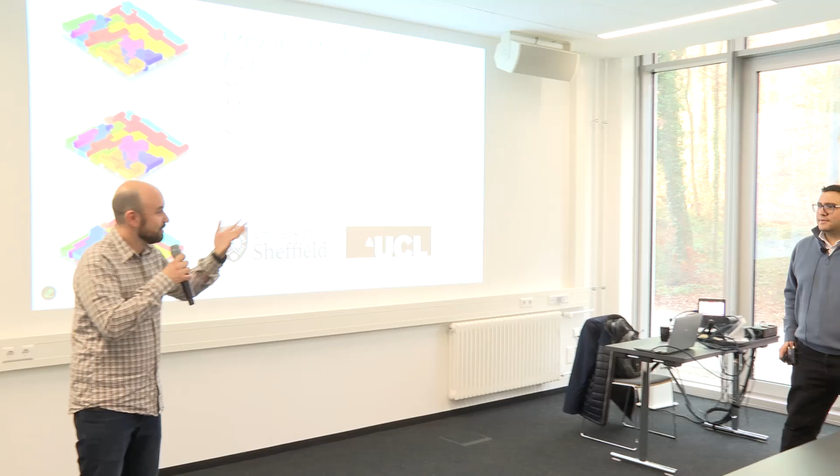After UCL, he returned to Sheffield, first with a strong teaching position where he got a few awards for being one of the best teachers of the university. Sorry, I increase the expectation a bit, but we will now see his presentation skills. And now he has moved to a fully research position. So he's back, and we are really happy to have him back in research.

So especially all the experimental biologists in the room, keep your ears attentive to see if you can find a link with what the technology proposes, if it can be useful for your studies, because it might be interesting to create a collaboration with Salah and see if we can attract him here to bring this technology with him and use it for our stuff. So I won't take further time. I leave you the stage.

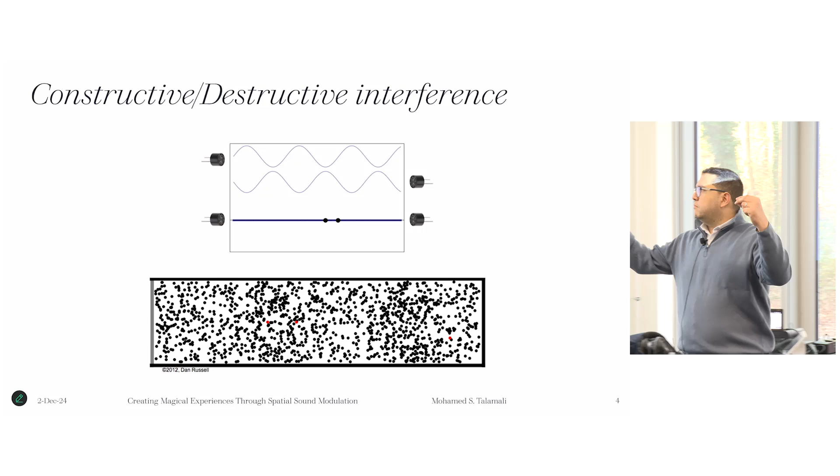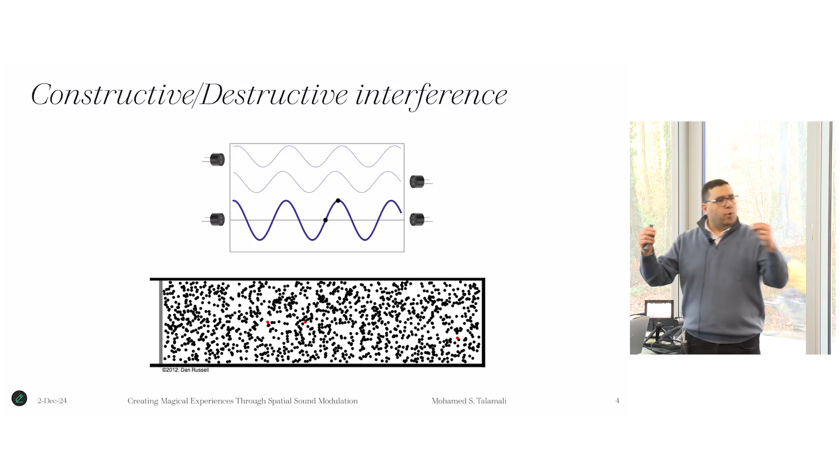So if you can let multiple sound waves interact together, you can affect the pressure of air the way you want. Here, if I put two speakers facing each other and let them emit sound waves that travel in opposite directions, I can create what is called a standing wave. As we can see, the resulting wave just flips its amplitude, but there are points that don't change in pressure. Why do we call it a standing wave? Because it's not traveling, it's staying there. So this is one example of waves interacting with each other.

Another interesting example of adjusting the pressure of air is when you put multiple speakers. You can put them in an array configuration, like here, or in a bowl configuration. And by controlling the phase delay between the sound waves, you can let all the waves arrive at the same point at the same time, such as here, and you create what is called a focus point.

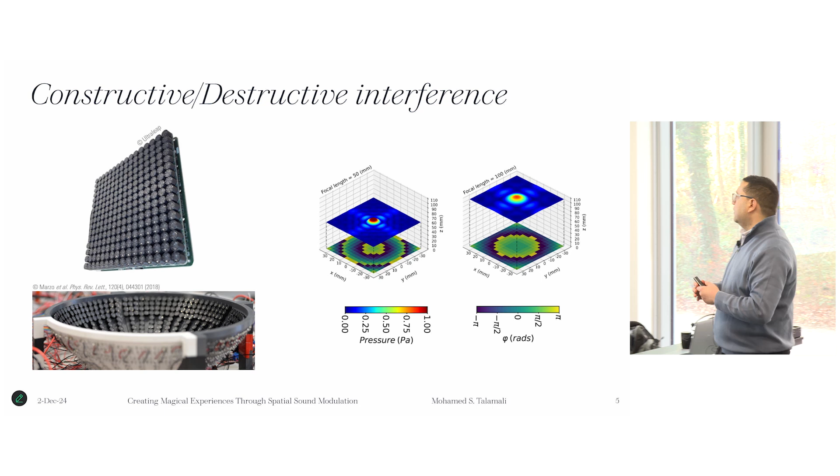So all the sound waves will meet together, and they add with each other, and they create a high pressure at that point. In this case, from now on in this talk, you will hear me speaking about spatial sound modulation. And it is this technique of using sound emitters to vary the pressure of the air around them.

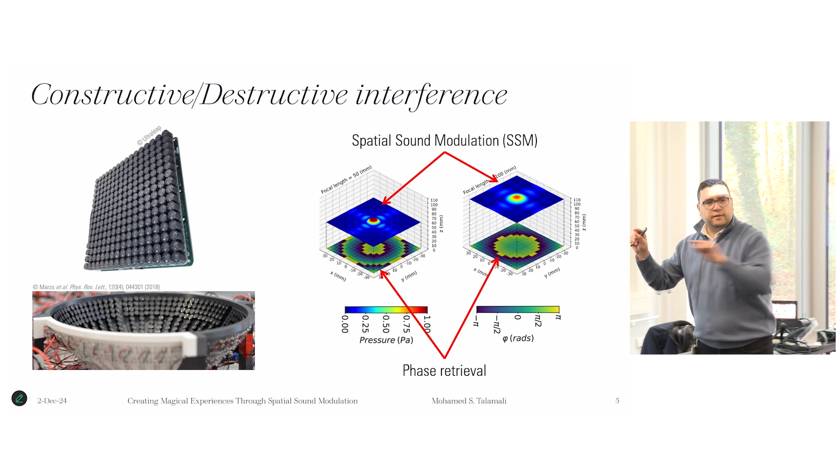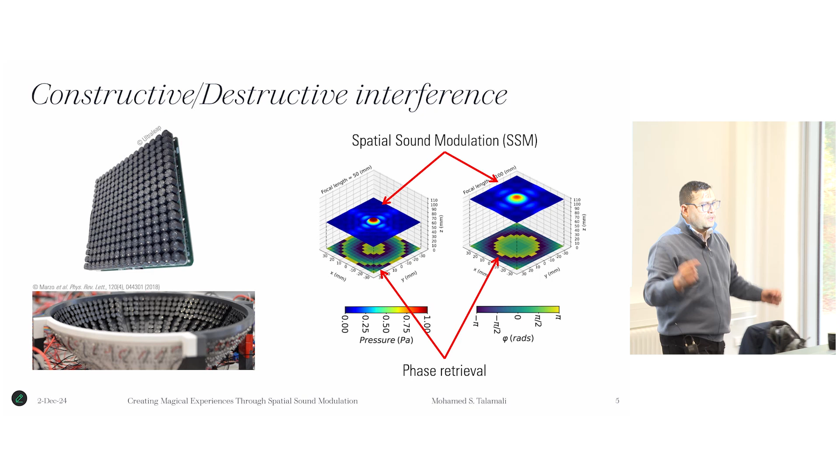And one key thing is to find the delay between these waves. And that's called phase retrieval. So to let them all meet at the same point, you need to find the delay of each speaker, so they all meet at the same point. And if we say pressure applied to a surface, what we say in physics, we say a force. So the sound waves, when they interact with objects, exert on these objects what we call acoustic radiation forces.

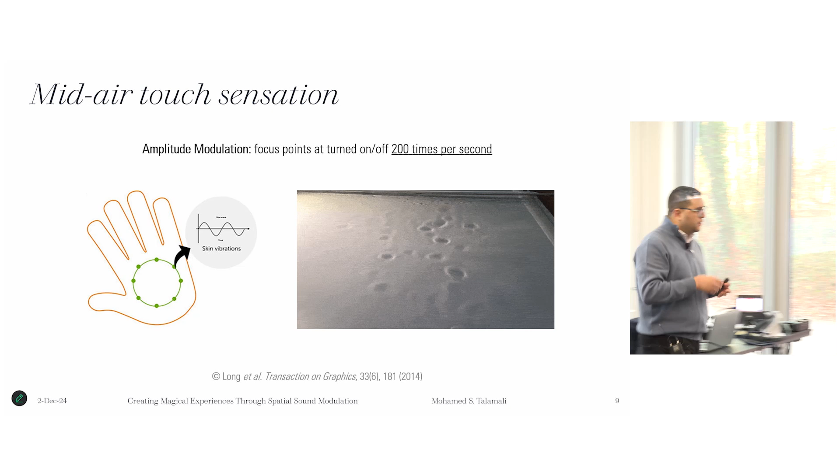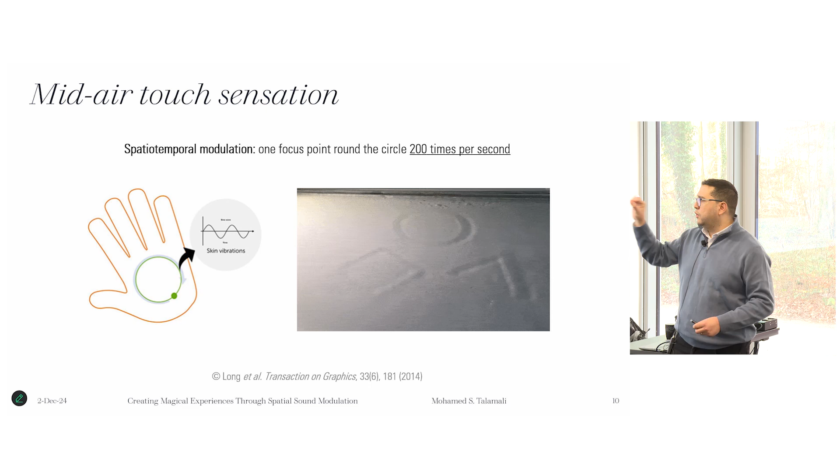So they know that the human's tactile receptors are able to sense things if they change at a frequency of 200 to 300 hertz. So they turned on and off this speaker 200 times a second. And you can see the effect of that on an oily medium. But also they have done the same thing using one focus point. So they create that one focus point and they keep moving it as a circle, right? And they do the full circle 200 times per second.

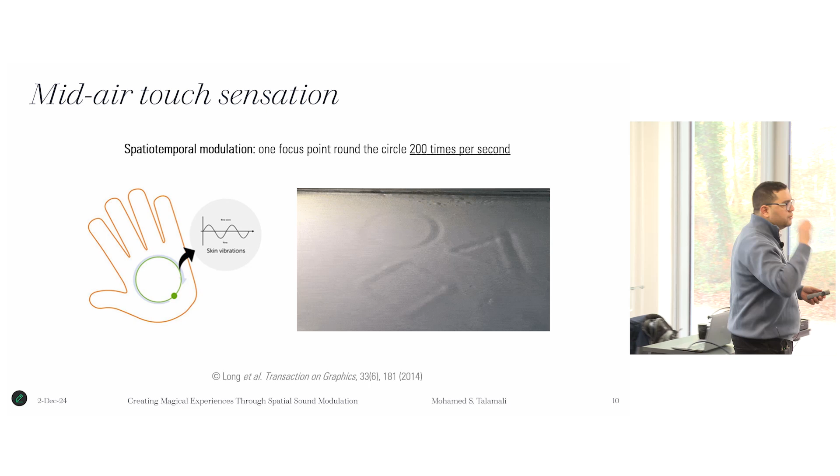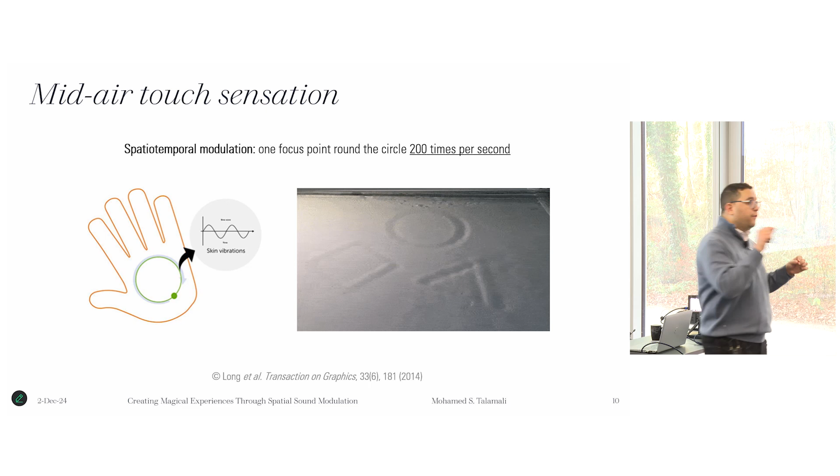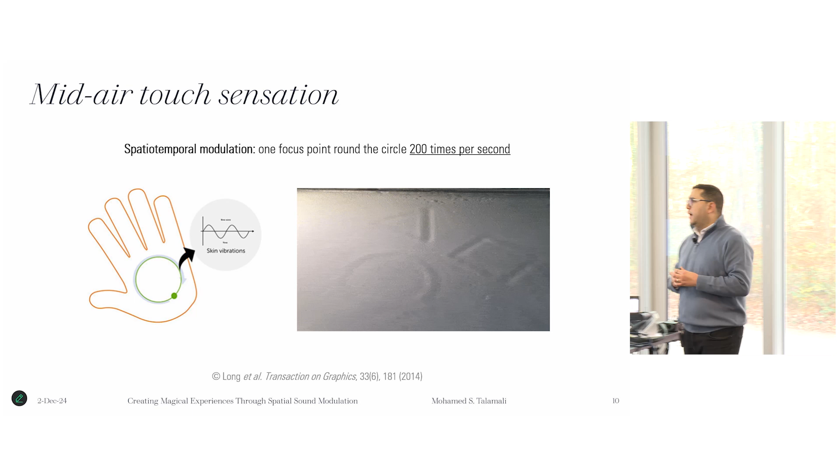So the question you'd be asking, how to get all the sound focused on these points. So what did we say before? How are we able to focus sound waves in a point, for example? What we said earlier is that if I want to get sound focused all on the same point, I need to find the delays between the sound waves to make sure that they arrive at that point all at the same time. So they add up together, creating this zone of high pressure. So what they have here, I'm trying to make it simple. There are a lot of equations, and I don't want to bother you this morning.

So they have desired focus locations, and they have models to compute the pressure field that these speakers together will create as a function of the phases of each speaker. And they add some constraints to adhere to the transducer specs, their power, etc. And they combine this into an inverse problem. So they have an equation that contains the delays of the speakers, the phases, and a desired sound field they want to create, and they solve this inverse problem on the computer to find those delays.

One challenge is you need to do it really fast. If the user is moving their hand and the intersection is changing and the point of focus is changing, you need to do this computation really fast. So the method you use needs to give you that speed.

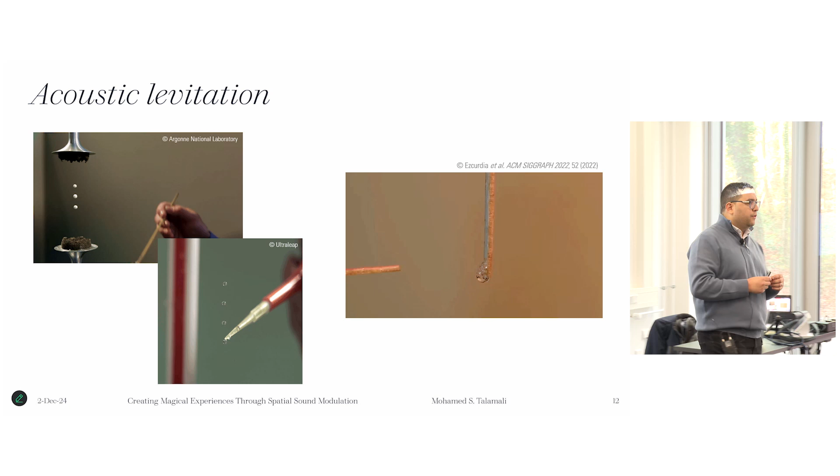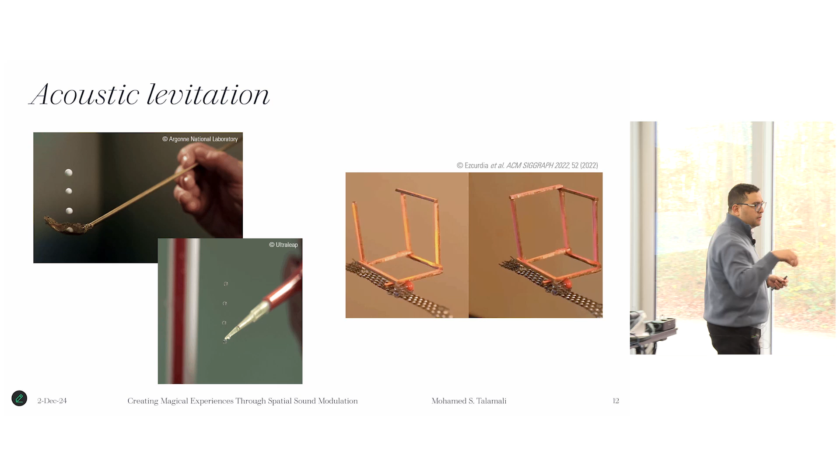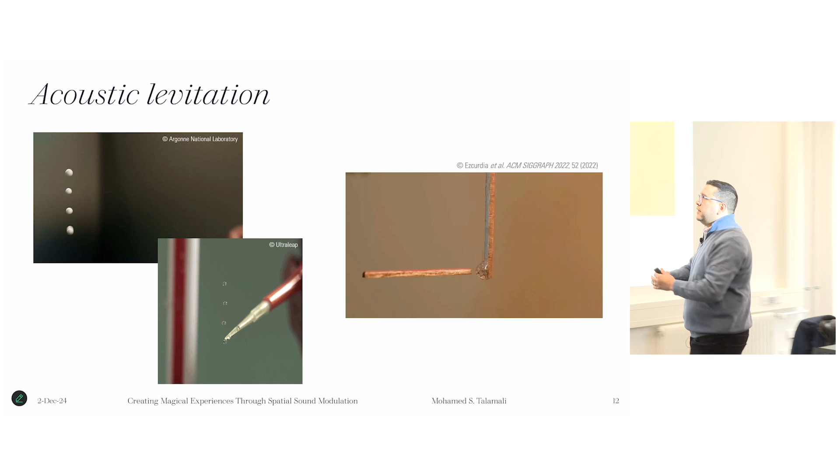So another application of this control of sound pressure is levitation, acoustic levitation. Using the sound pressure, you can keep objects suspended in midair. So let's not think of big objects, just really small objects of light weight. That's what the force created by that pressure can give you. So you can levitate these small spheres, polystyrene spheres, or you can even levitate some liquid droplets.

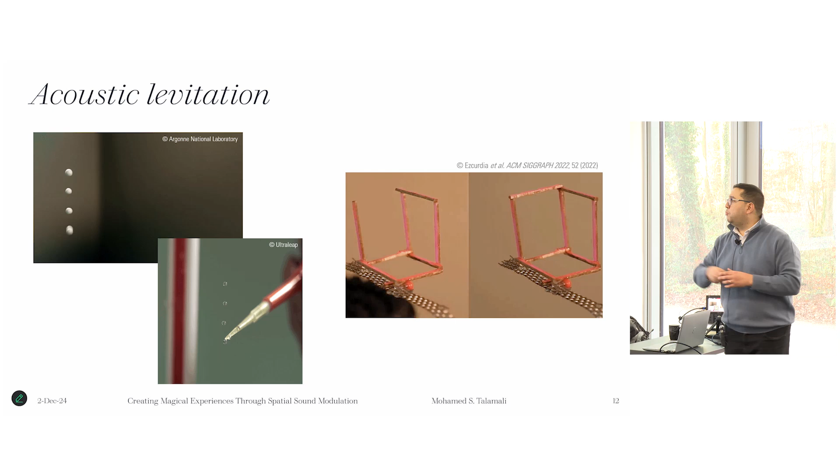But recently people put a levitator as the end effector of a robotic arm, so they did cooler stuff, such as using that levitation force to assemble things together.

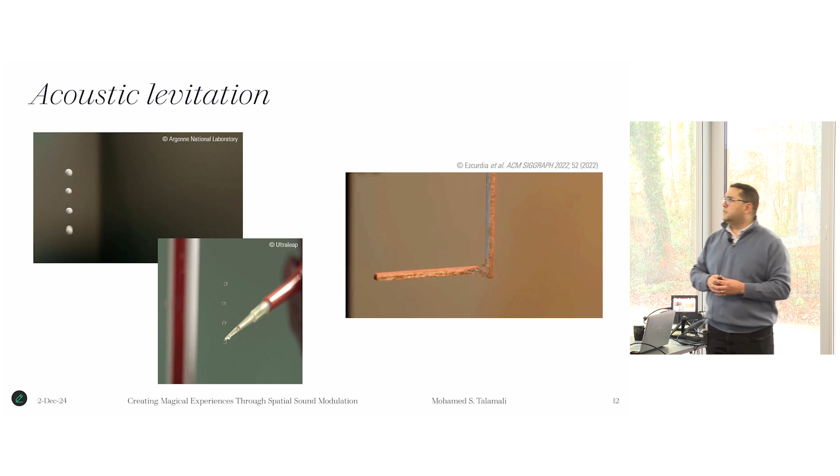Traditionally, you can do acoustic levitation simply by aligning speakers. As we said earlier in the second slide, I think, you put speakers and you let them emit sound opposite to each other. So if you want to make a little levitator, you bring two ultrasonic speakers. Actually, you must be thinking, how can we keep emitting all this sound? Won't it be annoying? This is using ultrasound, so it's not audible to humans, right?

So you bring these two speakers and you let them emit sound waves, and they create this standing wave, and we know from this radiation force that those objects will be kept at these nodes there. If you want bigger forces, you can make a setup like this, where you have these two bowls of speakers, you align them with each other, then you let them emit sound.

One thing here is that the sound emitted by the top and the bottom speakers is pi or 180 degrees out of phase. The reason for that is, if you don't do that, you will still be able to levitate. It's just that the levitation point won't be symmetric. This is the traditional setup of a levitator.

The issue with this is that you will only be able to levitate things in the middle of the setup. So if you want to move this bit here, it won't be that simple as just emitting sound waves. So people came up with a framework that allowed them to actually levitate this object, but also move it around.

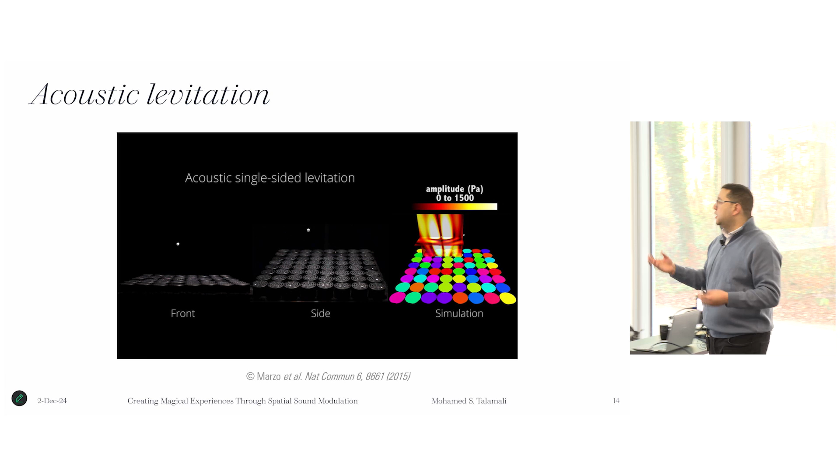And how you can do this is by finding these phases, more complex than simply turning on, sound gets emitted and you get the levitation; you need to set the delays of the speakers in a smarter way. And they were also able to do these rotations, so they were able to rotate this levitated particle, but you can even let that particle spin using this bowl configuration of speakers.

The way they did this, they have a model that lets them compute the sound propagation from each speaker, and that's a function of the delay from each speaker. Once they write the pressure at any point as a function of the delays, they compute something called Gor'kov potential, and it's a field whose gradient gives you the force exerted on an object at a location. And when you apply the Laplacian to that Gor'kov potential, you get the strength of the force at that point.

And then, if you write the strength of the force in terms of these phases of the speakers, you can do an optimization to solve this inverse problem, to find the phases that allow you to maximize the strength at certain points. And those points are called 3D traps. So they trap your particle at those points.

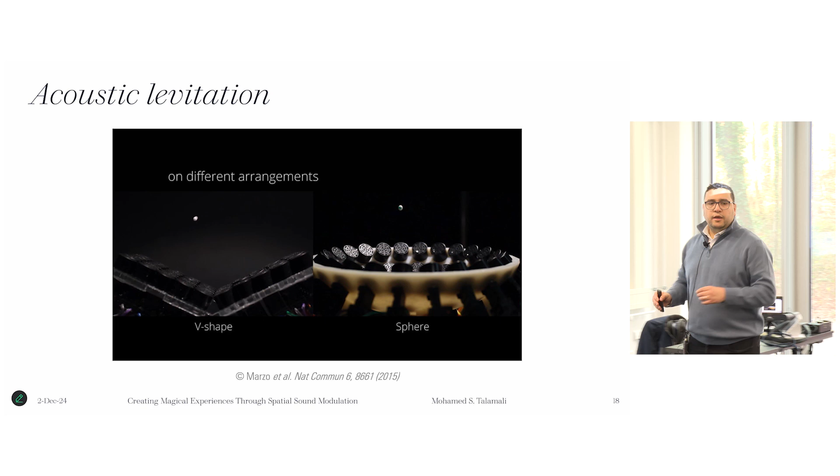And thanks to this technique, originally we said you need two boards of speakers, one on top of each other. Thanks to this, as they are maximizing the force, you can even levitate this particle using a single-sided board. And as there is some optimization behind these forces, not simply letting sound waves hit each other, you can even create forces that defy gravity.

And then we have Hirayama and colleagues in 2019. They made this cool display they called a particle-based display. Since you are levitating that particle, you keep moving it fast enough to create what's called persistence of vision. So you start seeing a pattern of the particle's path. So if you shine light on it, you can see something in 3D like this.

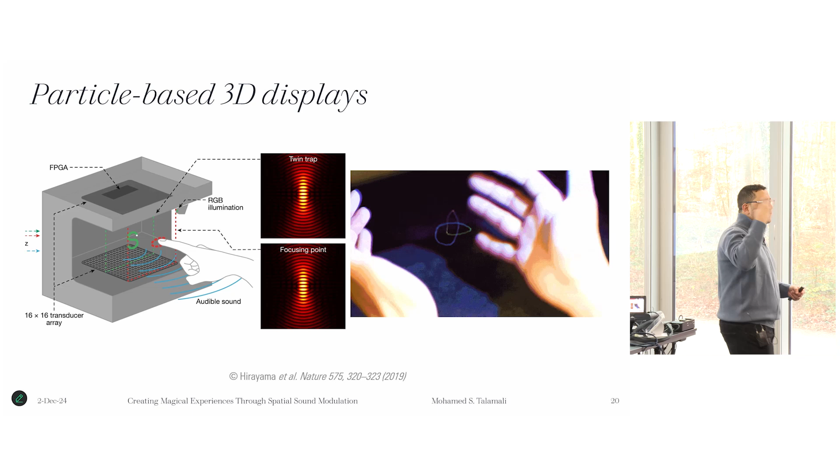And they also used the same technique to create multiple points. So one point will be trapping the particle, another point will have sound focused, so if someone puts their hand there, they can feel it, and at another point of pressure, they vary it to the pattern of a certain voice, so you can hear sound coming from a point in the air. There is no speaker, but they vary that pressure following the pattern of a certain voice, so you can hear that voice.

So in this application, I kept speaking about this speakers array, but there is one limitation of this speakers array. They are quite bigger than the wavelength of the sound. So if you want to create really complex pressure distributions, such as these images, you will get what is called an aliasing effect. This is because they don't adhere to the Nyquist sampling theorem, which tells you if you want to get full information, you need at least to sample at half the wavelength. So you get this aliasing effect.

So people started thinking about other technologies. So they created what's called acoustic metamaterial. So now instead of having a speaker that you control to change the sound delays, you create some structures, materials. When the sound interacts with those structures, those structures will introduce that phase delay you want on the sound waves. There is the transmissive format. So you have a speaker and some materials. When the sound of those speakers passes through that material, those materials will introduce a phase delay on that sound.

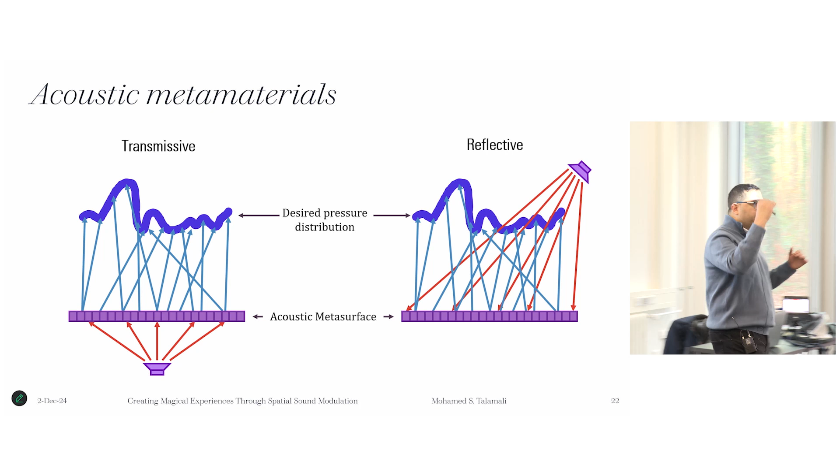Or you have the reflective format in which sound waves hit the materials, get reflected, and that reflection happens after the introduction of a sound delay. Think about it, if I have a sound wave hitting a material, I can adjust the height of the material to change the relative delay between multiple waves.

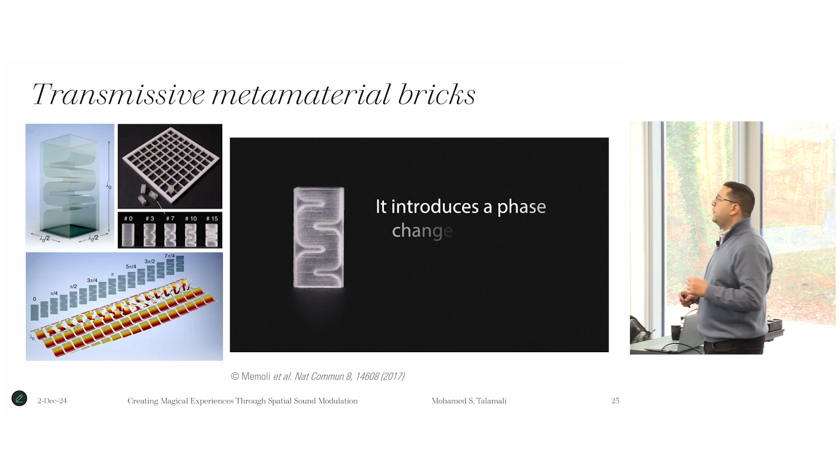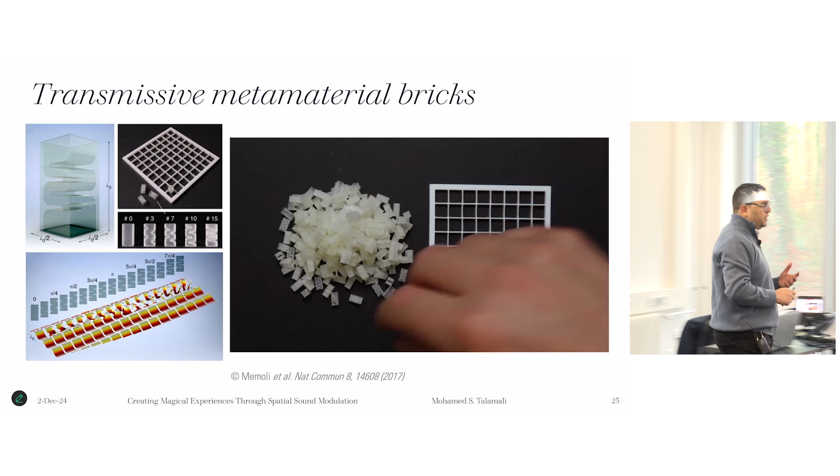So we have here Memoli and colleagues, they created what they call these metamaterial bricks. So they have this labyrinthine structure, and when the sound wave passes through this structure, each structure corresponds to a certain phase delay. So the same as before, I control electronically the speaker to have a certain phase delay. Now I can make this material, each of them will introduce a phase delay. So I don't have to do any electronics. I just turn on my speakers normally without any phase delay, but as the sound emitted by those speakers passes through this material structure, I get the phase delay I want.

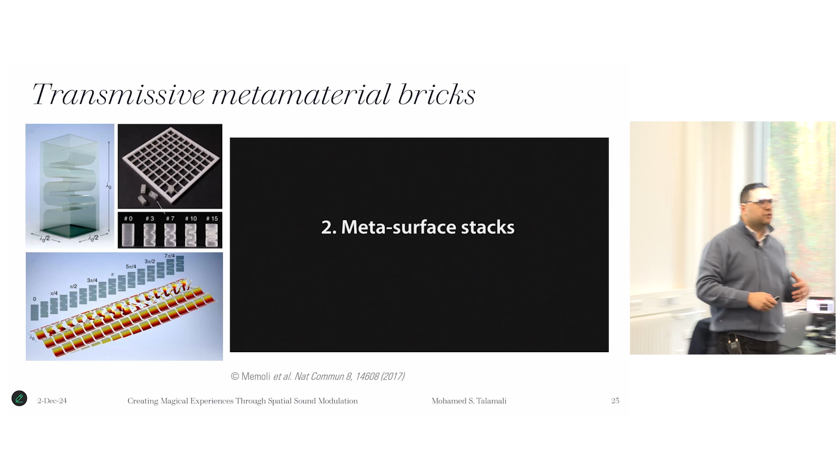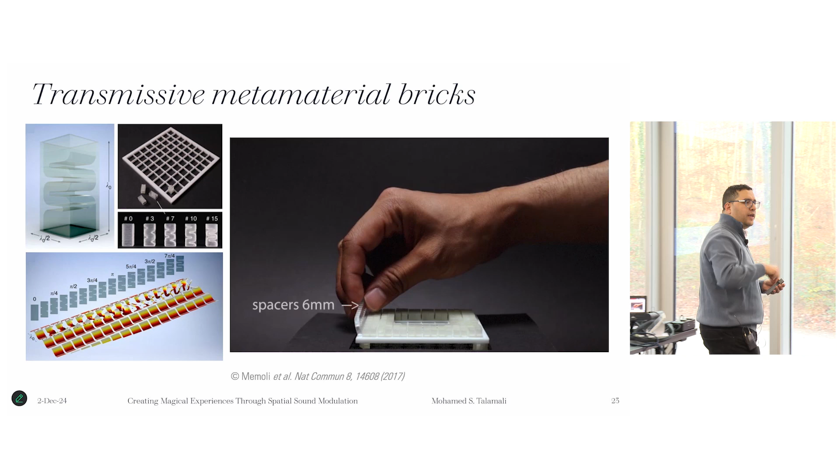So if, for example, I compute phase delays to levitate or focus sound, I can create those phase delays using the materials. So here they put this structure that contains many bricks. Each brick will have a corresponding delay. So they are able to shape the sound field and levitate a particle. So that was an example of a transmissive metamaterial. So sound passes through it to get this phase delay.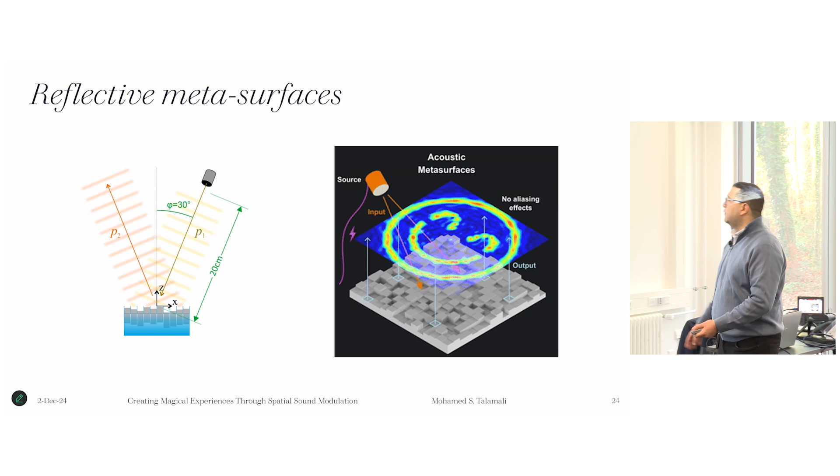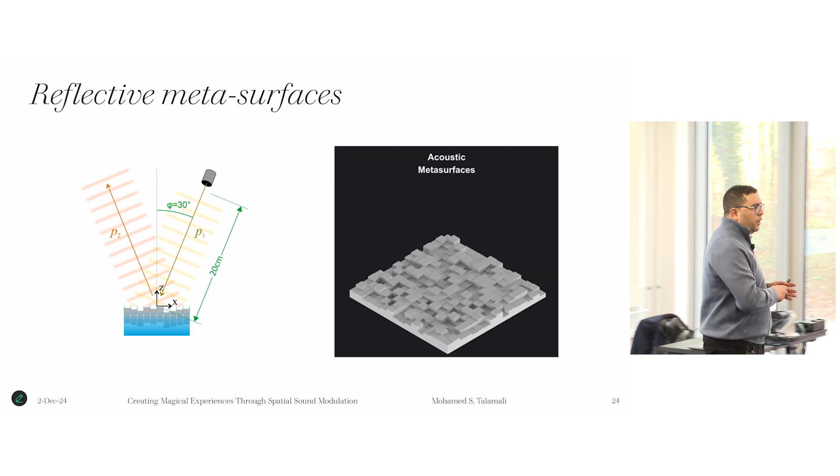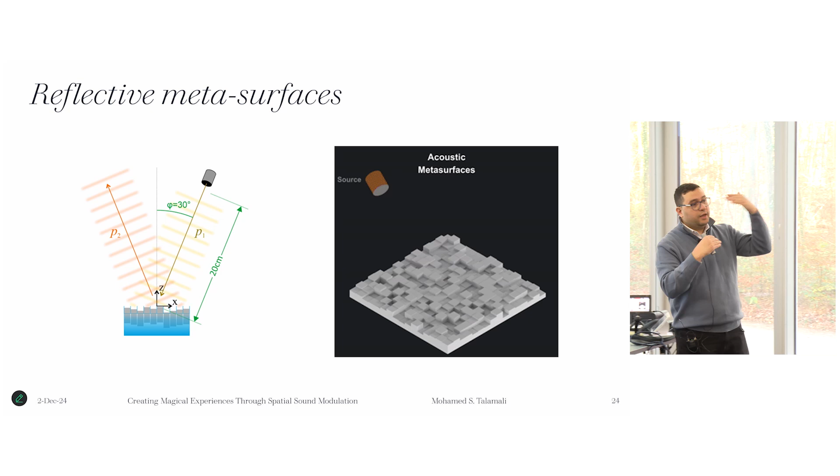Another option, as I told you, is the reflective case, the reflective metamaterial. And here you will have this material of different heights, and depending on the height, you will get a specific phase delay. Think about it, if I have two materials with a height difference, if the sound wave hits this one and gets reflected, it will arrive quicker than the next one, because for this one, it has to travel more and take more time to arrive at the same point, right? So this principle allows us to create the same effect, such as levitation or touch sensation, by creating those phase delays we want.

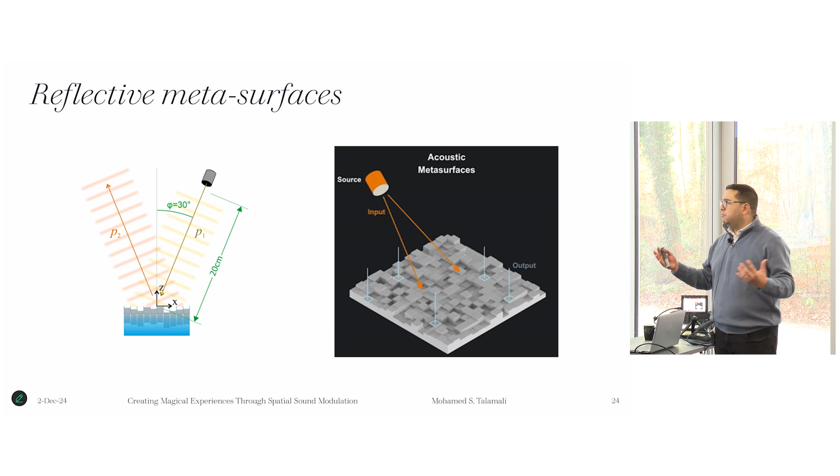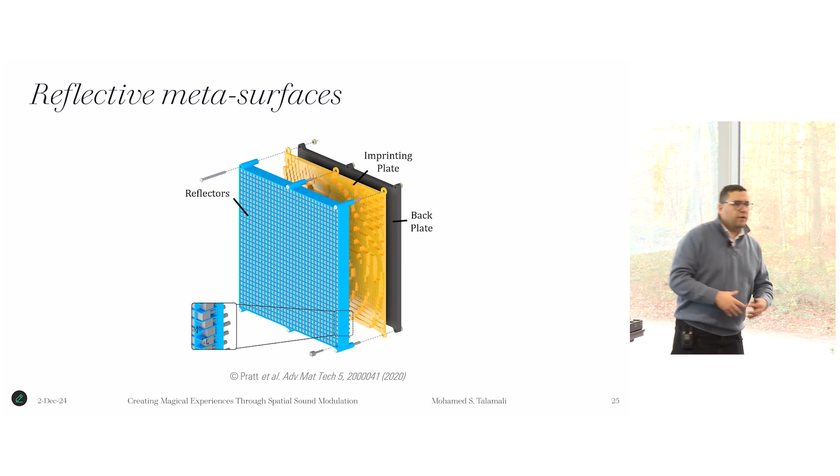So we have Pratt and colleagues. They created what's called manually reconfigurable metamaterials. So here you have this reflector. They are just pins that slide up and down. And if you want to get a certain phase delay pattern, you can 3D print these plates, and you put them in, and you introduce this phase delay across the surface.

So let's speak about the cost of these devices. Let's imagine the case of the speakers, phased array transducers, and the case of a reflective metamaterial. So for each speaker, you need a controller. You need a shift register to vary the phase or delay those signals. You need some amplifiers, and you need to connect each speaker to a controller. So if you have 256 speakers, you need, for example, an FPGA with 256 control points, and that's quite expensive, right?

And if you are speaking about a reflective metamaterial, if you want this reflective material to adjust the height of the elements live, what you need to do is put stepper motors behind them, so you push them up and down. So for each element, you need a motor driver, plus a control signal. So the cost of these devices is proportional to the number of elements you have.

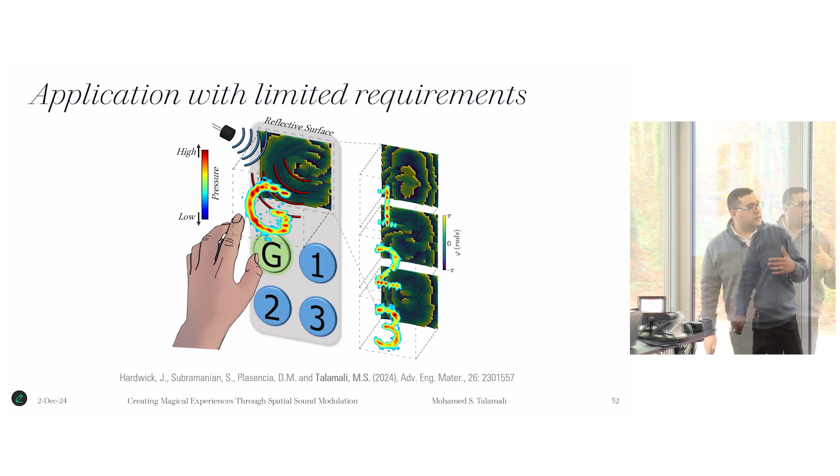So let's imagine you want to do this with a reflective surface. So you have a transducer emitting sound on the surface. You want to control the heights of the elements of the surface. So the G, the 1, the 2, and 3, and these are the phases or the heights of the elements, how you need to control the element. So in this case, with the same idea of this segmented display, we did the work where we try to create segmented spatial sound modulators.

So traditionally, as we saw with the speakers or the other technologies such as the transmissive and the reflective metamaterial, people use this setup. Speakers that are all shaped the same, these bricks, they are all shaped the same, and they uniformly distribute them, and that's the traditional spatial sound modulator. So what we wanted to do here is create these segmented SSMs. So they are made of elements, units that are of different shapes, and they are placed differently. The question is how to design such elements.

So let's imagine you want to create a segmented spatial sound modulator that has an area A, and it has n number of elements. What we mean here by elements are, in the case of a reflective metasurface, the elements you push with motors. So if you reduce this number, you are able to reduce the cost. But you don't want to do it randomly. You want to shape those elements according to the requirements of your application. For example, here I want to shape my elements in a form that allows me to reduce the number of them, but also not have poor quality of the distribution, right? So we need a method that allows us to shape these elements in a way that maximizes the quality. So we need to decide what's the shape.

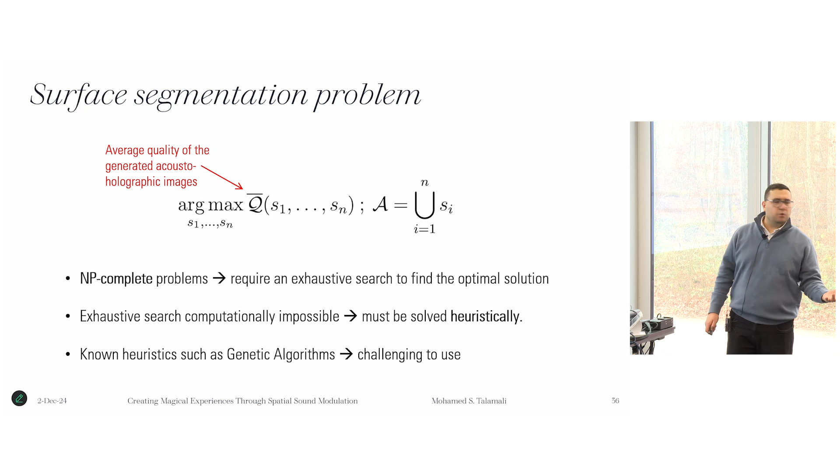If you know a bit about evolutionary algorithms, you need to evolve those solutions to get better quality each time. And there is no method for finding the phases of crazy shaped elements. All the methods that exist assume uniformly distributed elements of small size, and they are able to find you the phases. So instead of starting from the solution, what we did here is start from an ideal solution.

So what we do, we assume initially our surface is split into m by m little elements. Then we say, okay, imagine we have this surface. What will be the phases that each of these elements apply, or the delays that each of these elements apply to the incoming sound wave to get our acousto-holographic images, which are the G1, 2, 3. Then we apply an iterative phase retrieval algorithm, and we find those phases. So now we have this surface with a lot of elements.

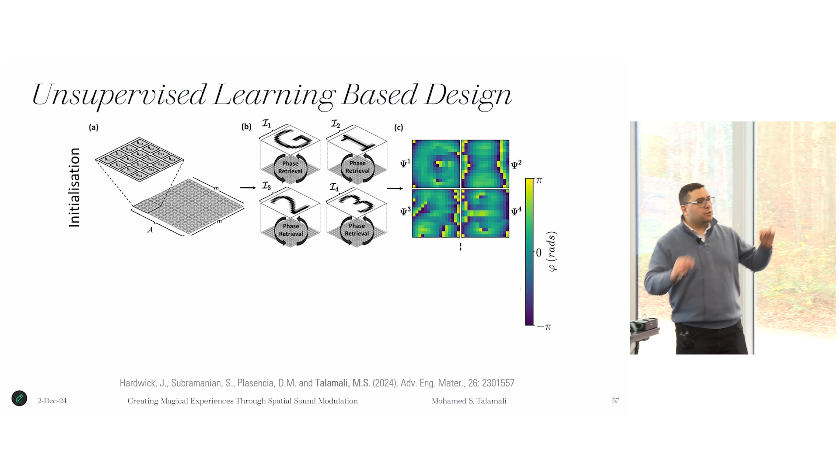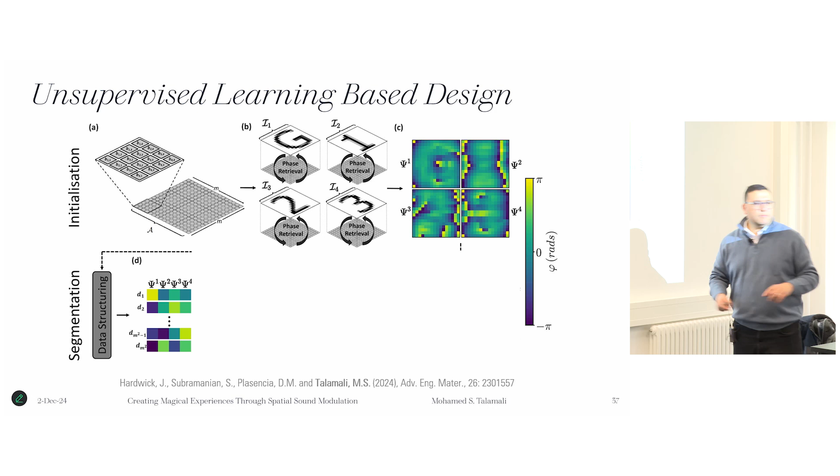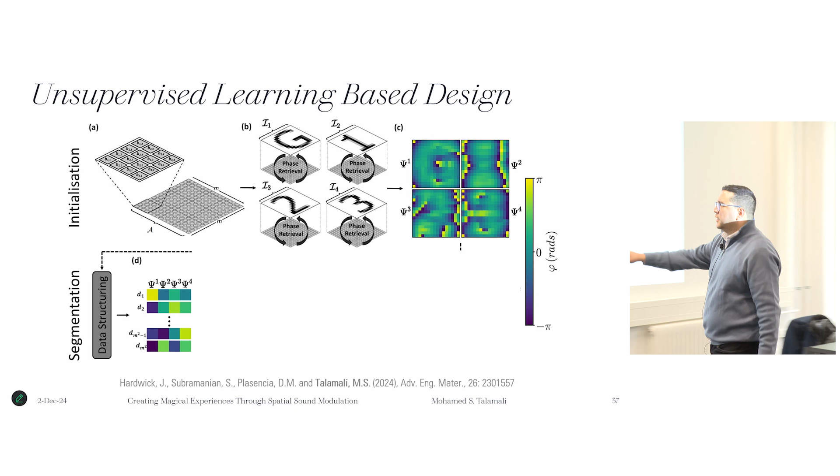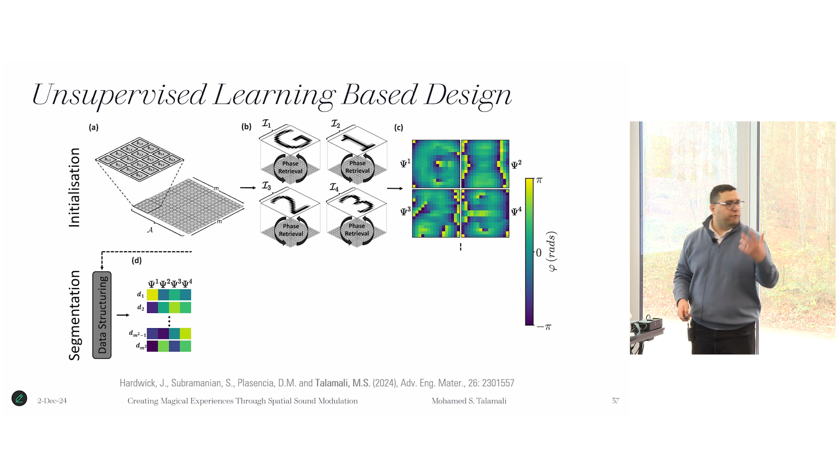Starting from that, we want to start putting elements together to create crazy shaped elements. So what we do, we organize data from this phase distribution into a format that is appealing to unsupervised learning or clustering algorithms. Once we organize it in that format, here each row is an element, and each column is the delay that element must apply to the incoming sound wave for getting a particular distribution. Then we give that data to an unsupervised learning algorithm that clusters this data into combinations or aggregations, groups of elements.

So it groups elements together, and our way of grouping elements together here is those that do generally the same thing. So we have a similarity metric that allows us to judge if grouping certain elements is good or bad. Generally, you group elements when they are doing the same thing. So let's imagine 3 elements that always introduce the same phase delay to the signal. It makes sense that you put them together and then you actuate them together with the motor to have that same phase delay.

And we have been able to introduce some constraints, such as saying, I want only to group elements that are adjacent to each other. So contiguous elements. I don't want you to tell me these elements that are far from each other can work together, because if I want to actuate them with the same motors, that can be physically challenging.

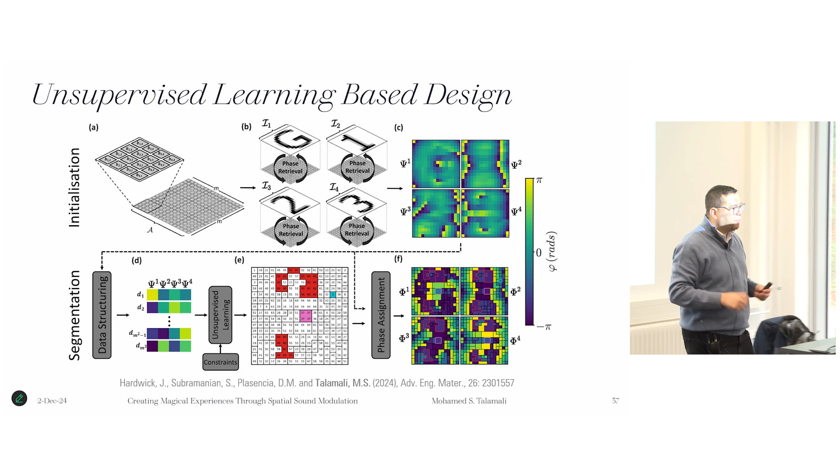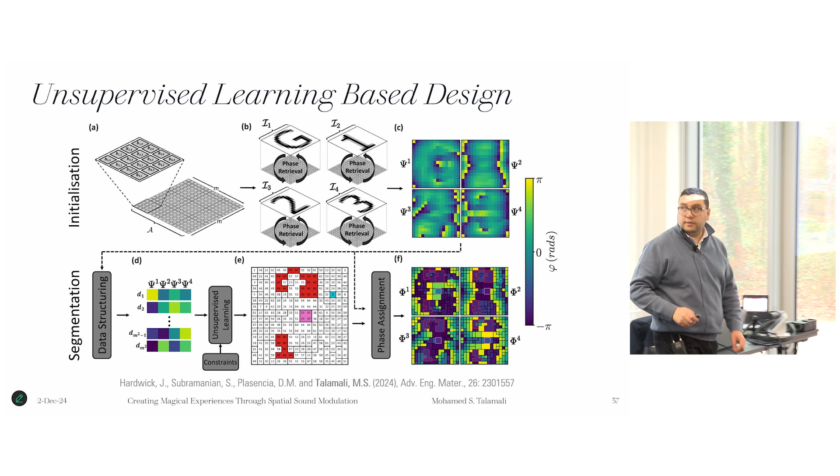Finally, as I told you, it's not really possible or nice to do phase retrieval for crazy shaped elements. So what we do in our approach, we can infer the phases of these segments, you can call them, these groups of elements, starting from the phases you found initially for these uniformly distributed elements.

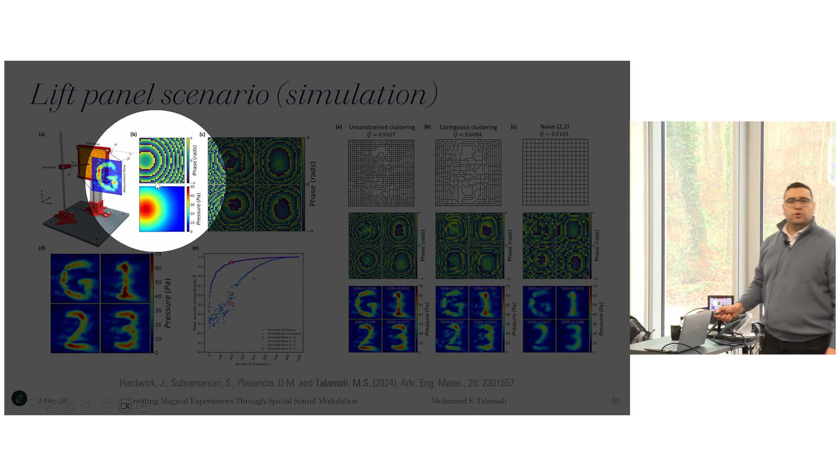We tried to apply that with our G123 example. So we created this experimental setup where there is a single speaker striking sound at our metamaterial surface, and we want to show an acousto-holographic image there as shown in the setup. So first we found the phase and amplitude of the sound wave hitting the surface. Then we did a phase retrieval to find the height of the element we should apply to create each of the G123 elements.

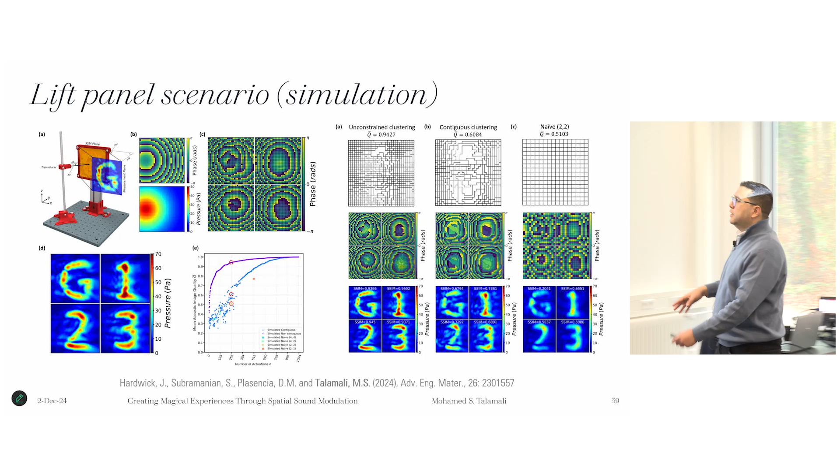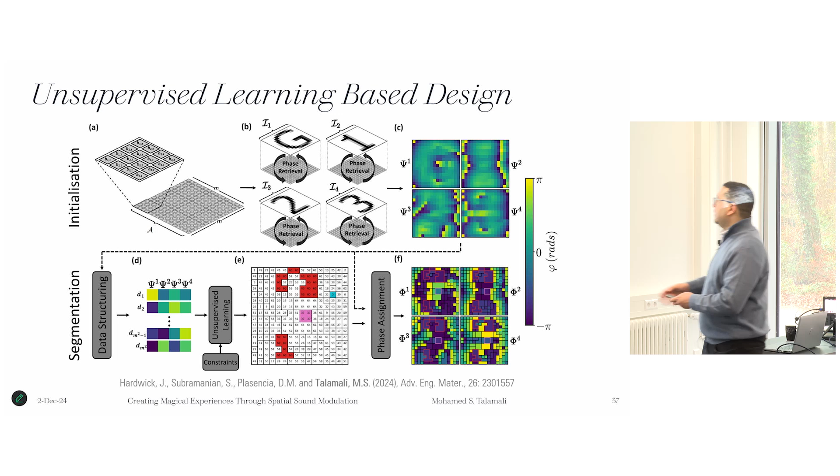Here we show what images this pixelated version will output. That will help us check the quality of the distribution that our segmented elements can show. Basically, if I create this segmented structure with these phase delays, I can propagate sound on it, measure the sound, and if I want to say how good it is, I can compare it to the best pixelated version. That best pixelated version, containing a uniform high number of individual elements, gives me the best image, so I can compare the image I get on my segmented surfaces against it to say how good they are.

And there are some image processing metrics such as the SSIM metric that can tell me the quality. Here I'm plotting the quality against the number of elements of my surfaces outputted by the method. And then I'm comparing them to naively segmented approaches. These naively segmented approaches basically cluster pixels that are together into 2x2 elements, 3x3 elements, 4x4 elements. And we can see here, this is a Pareto curve. So our approach, for the same number of elements, can output higher quality images than simply naively joining elements together.

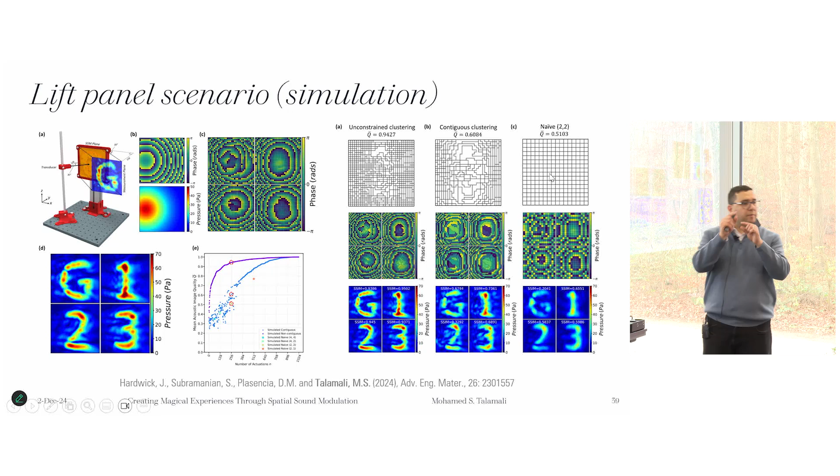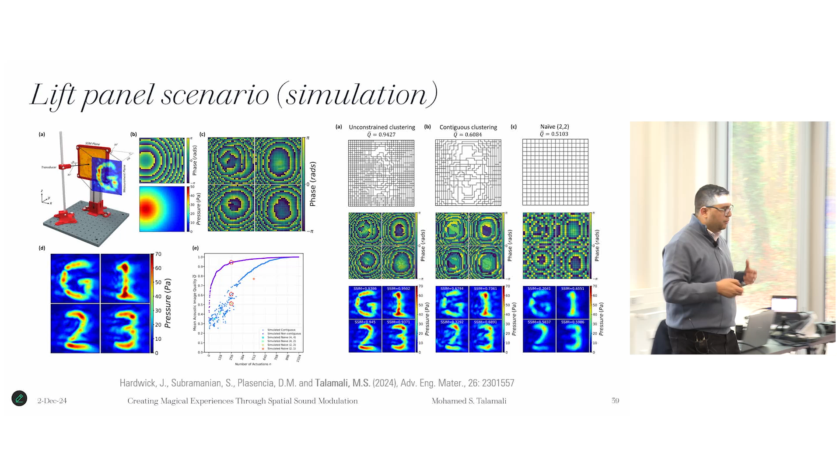And you can see here the images outputted by our approach. All these 3 solutions have 256 individual elements. This is the one outputted by our approach under no constraints, so 2 elements far from each other can constitute a segment. And here we impose a constraint to say that only elements that are adjacent to each other can be grouped. And in the last one, we do this naive segmentation where we join 2x2 elements. So each 2x2 pixels become a single element together. And you can visually see that our approach is superior to this naive segmentation.

We have done this with simulations, and then we validated this physically. So we built these 3D printed plates of the different states. And we have here our setup with the speaker striking sound on the surface. And then we have this robot that has a microphone at the end, so it moves and measures the pressure. So we can measure this pressure distribution we created.

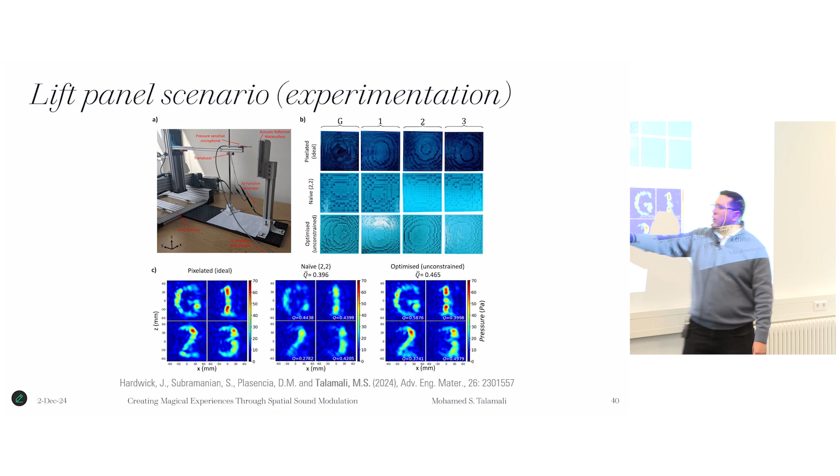And again, our approach is outputting distributions that are closer to this pixelated, or as we call it, the ideal solution. So we are closer to the ideal solution than the naive segmentation approach.

And we have done a scalability analysis in which we applied our method to cases that have different numbers of images. And as you expect, it will get less good as we increase the number of images. So if you have a 7-segment display, if you start telling it to output images, you won't see anything. This is basically the same thing. So if we add a large number of images, we are not able to get this low number of segments and maintain the quality.

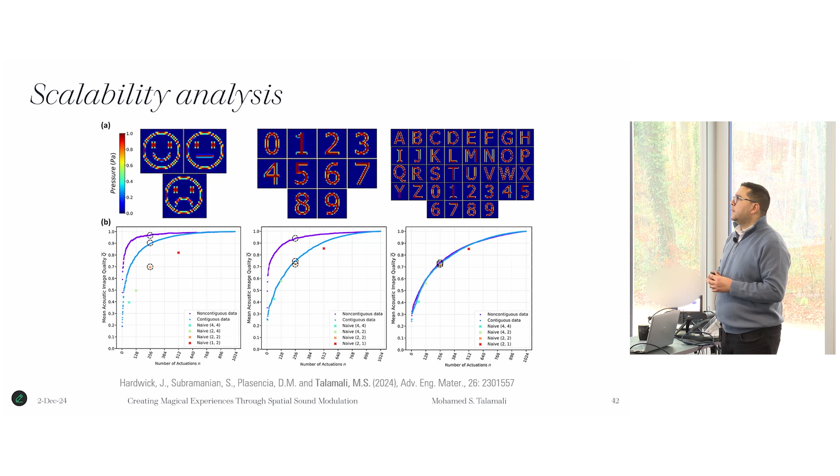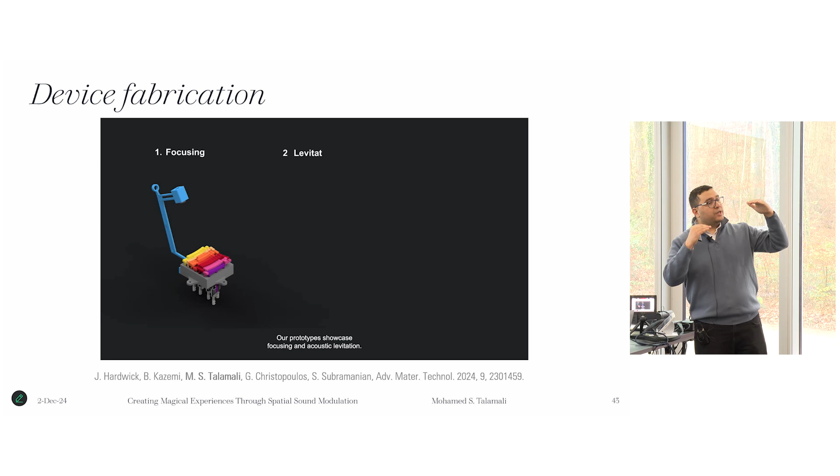Then we modified our approach. Before, we were gluing together or combining elements that generally do the same phase, apply the same delay to the waves. So now here we have improved that method to even account for the differences. So if two elements always do, not the same thing, but at the same difference, we can glue them together and construct them with a difference.

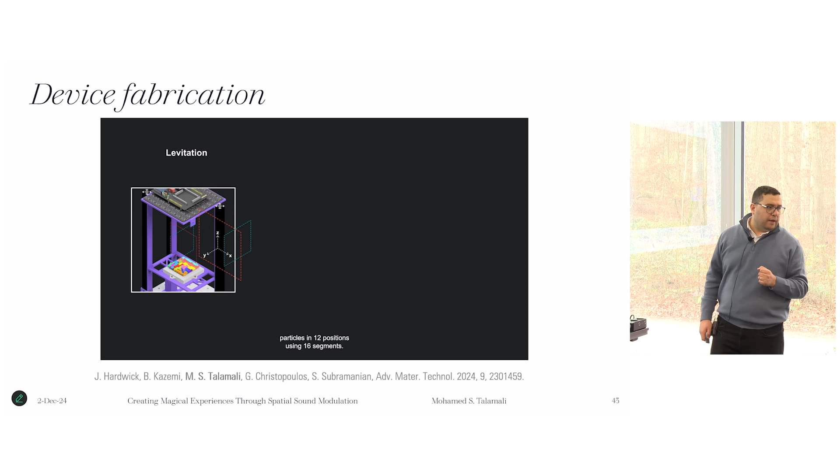Then we built a device with motors. So in this work, we have actually added the motors and measured the sound distribution outputted by our method. So we used it for creating this focus, but also for levitation. So on the bottom we have our reflective metasurface, and on the top we have an array that emits sound. We showcase combining static and dynamic elements.

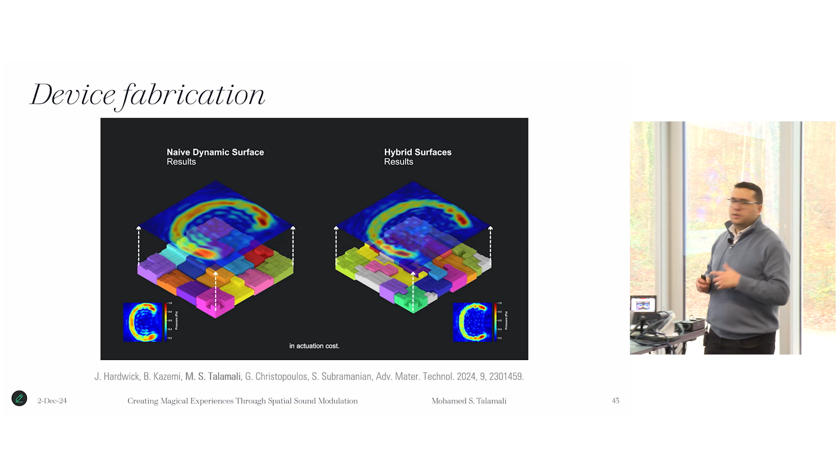We have also explored the case where you have some elements that always remain static, while others are dynamic. So you can even reduce the number of actuators because the static elements don't need a motor. You can construct them as they are, and you keep them that way without having to push them up and down. Yeah, this is the end of the second part.

And I want to end it by thanking my co-authors, Professor Sriram Subramanian, PhD student James Hardwick, and Diego Martinez, for the help they gave me, especially in hard COVID time, through Teams, teaching me and helping me to do things in an area that I didn't know about at that time.

Do you have any questions before jumping to the third part, where I will ask you more questions than you ask me? So the reason why Giovanni invited me here is because he thought that this technology of using sound to give the sense of touch or levitation could enhance or add something to the setup that already exists here.

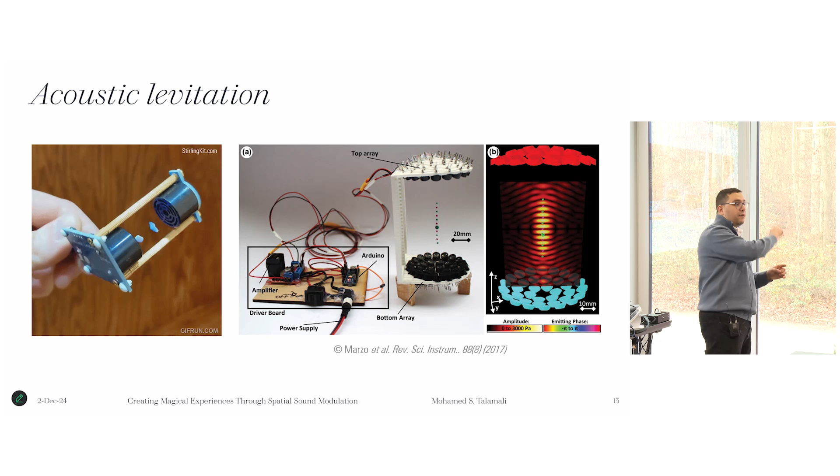Because basically when you write the analytical expression of the sound, at a certain point you can say: this is the sound coming from the speaker there, but also the sound reflected back. So you account for that analytically. So that's how people do it.

Actually, they are doing it now with an object in the middle, because they want to do 3D printing using this technology, by moving material that you shine light on and it gets solid. So they are thinking about this element of having an object in the middle, and basically you account for those reflections in the computations.

And can you potentially also bring sound only to some specific animals? I mean, audible sound that can be heard only by somebody and not by the person next to me? Like we are all here in the room, but you send some sound information only to one. There is an application of this called directional audio. There are some companies making speakers using this technology. They put them in museums, for example.

So if you sit next to a piece of art within a certain range, you will hear about that piece of art. If you step to another place, you don't hear it. I didn't look at exactly how they do it, but there is an analogous case to this, which is directional audio. But I don't know exactly; I haven't looked at how it works.